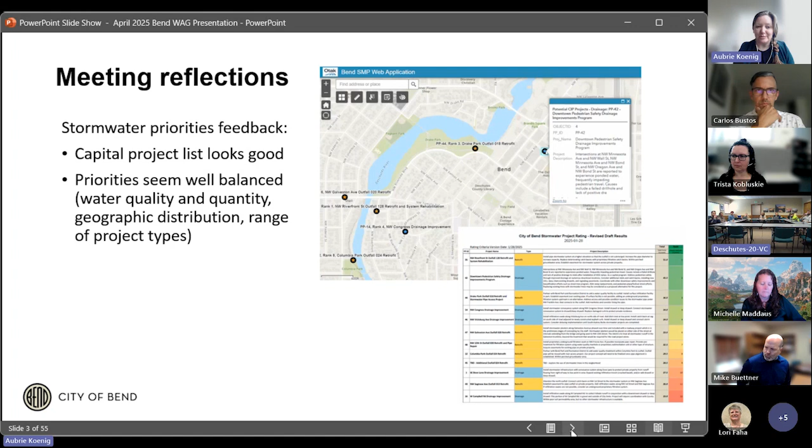We didn't have a chance to meet in March, or didn't need to meet in March, but back in February we did have a chance to hear from the Stormwater Master Plan team about the draft list of project priorities as part of that planning effort, and got some quick feedback and thumbs up generally from the group, the WAG members, so a good balanced list. There's a couple of snaps from the map and the project list that we went through. As always, the meeting recordings are available through the webpage if anybody didn't get a chance to join us in February and wanted to hear how things turned out. That will be our topic for next month as well, the Stormwater Master Plan.

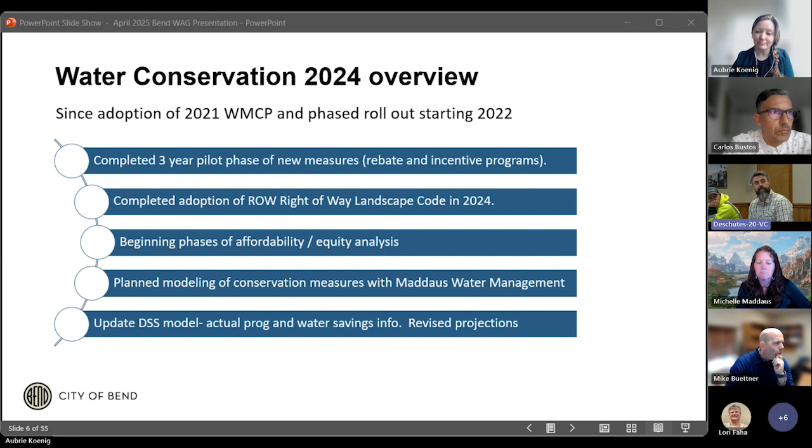So that's one piece of the work that we're going to be doing with Maddaus. And the second piece you'll hear a little bit more about today is investigating some conservation-based water rates. Next slide, Aubrie.

And the primary reason is we get our population data from Portland State, and they did a historical correction in the years of 2020 through 2023. And they actually lowered our population numbers. So then our calculation of GPCD goes up a little bit.

We're seeing a general downward trend, a little uptick this year with more water production happening. We're looking at things, higher peak temperatures. We had a higher peak day than a typical year, happening in June instead of late July this year. We had longer stretches or longer windows of peak day temperatures. That's something we're tracking, and actually over the last few years, we're seeing that trend where our peak days are lasting 6 to 8 days instead of 2 to 3 days. So some possible reasons of why we saw that uptick in water use. Next slide.

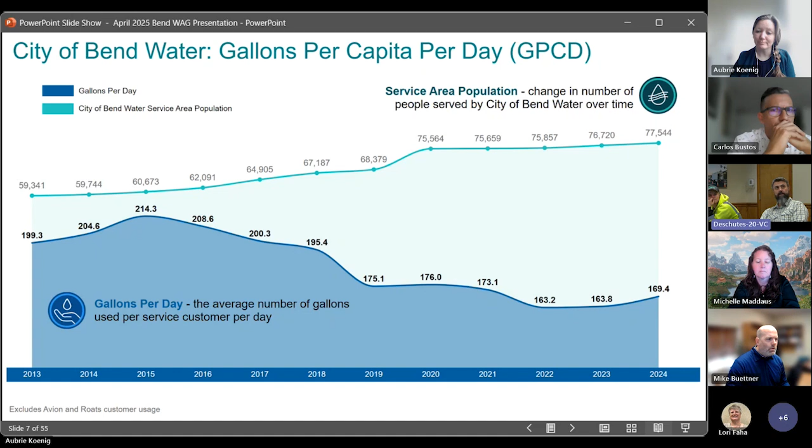So rebate incentives. The main idea here is we're seeing increased participation from year to year in our indoor-outdoor devices program. These are high-efficiency water use devices. We rolled this program out in 2022 after our WMCP adoption, and we're happy about that.

That is a council goal of ours, to increase participation in these programs. And we are seeing a positive uptick in water saved. This is not assumed water saved — we're actually calculating the water savings in a post-retrofit year versus a 3-year average prior to the intervention.

Can I ask how often the applications are coming from individual households and businesses versus coming through a contractor or irrigation company? I'd say the minority right now are coming through the contractor. At least on the single-family residential side, they have to log in through the WaterSmart portal, so they'd need login credentials from the customer to do that. On our commercial and multifamily side, though, we are seeing more come through the property manager.

So late in 2024 and now in 2025, we have more sites like Housing Works taking part. We also have some of the retirement homes, and those are coming through the third party.

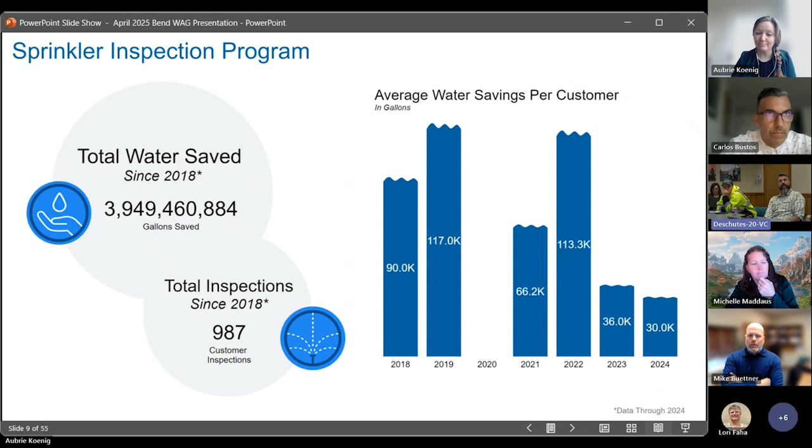Still a viable program, but interestingly you can see that downward trend in average water savings. We're still saving roughly 4 million gallons a year. What we're seeing, I think, is a lot of the low-hanging fruit going away — as we talk about conservation more, people are hearing it through different media and through the drought spells we had, so we're seeing a little less excess use even in those targeted customers.

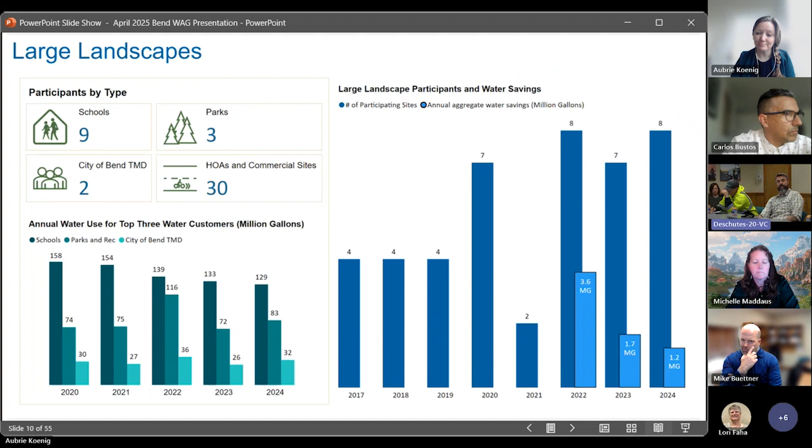If you go to the graph on the right with the blue bars, what we're seeing is growth in interest, primarily through HOAs — people contacting us to participate, looking for water savings opportunities, but not as big savings as we see through parks or schools maintaining 50-some sites. We're looking at some HOAs with maybe 15 to 20 homes with a little common area, up to large HOAs with multiple acres of landscape.

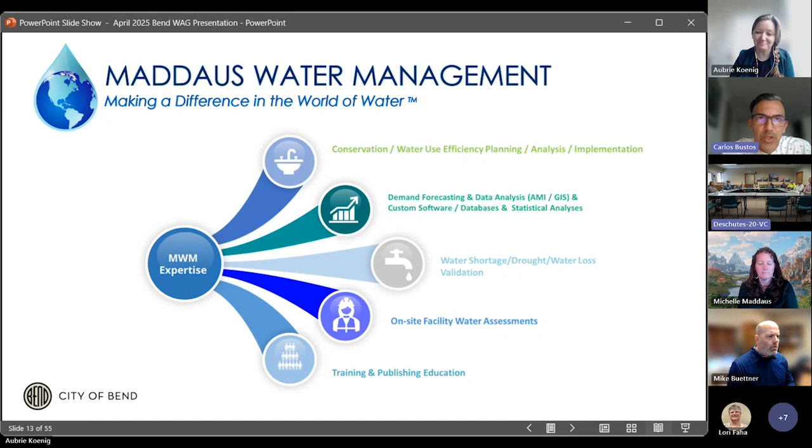We're considered a small firm. We've got 9 employees throughout California, Colorado, New Mexico, and New York. Our expertise is in water conservation planning and implementation. We do demand analysis and forecasting, and we work with urban water use objectives in California, developing urban water management plans. We also have a few publications, including the Water Conservation Guidebook for AWWA and the International Water Efficiency Guidebook. Michelle Maddaus and Lisa Maddaus are the current leaders and owners.

So today I'm going to be covering a couple of topics. I'll try to be concise and precise with each slide, and we can either have discussions or questions as we navigate through, or wait till the end. I think we have 20 or 25 minutes allowed at the end to gather feedback and really go in depth into what we're trying to achieve and our next steps.

So I'll be reviewing the project scope. Dan alluded to the work we're doing, and I'll cover it a little more in depth, but briefly. The related work, which is the one I'm leading, then the purpose of rates, covering all the rates included in some of the publications I'm using as references. I'll talk about elements of rates, and then Dan is going to jump in and help me cover the current Bend rate structures. Then I'll compare some common rate types, and go in depth into the main research, which is understanding budget-based rate types, and then gathering feedback.

So the project scope, which we've been hired by the Conservation Department to work on, covers 2 main tasks. One is reviewing and refining the city's decision support system model. We worked with Dan and his team back in 2020, where we looked at conservation measures, population growth, different customer categories, projecting droughts, and future conservation. We plug that into our model, which projects demand forecasts and the impact of conservation measures and future population growth. That's the first aspect, which Michelle Maddaus is leading and working with Dan. I'm going to be focusing on the second task.

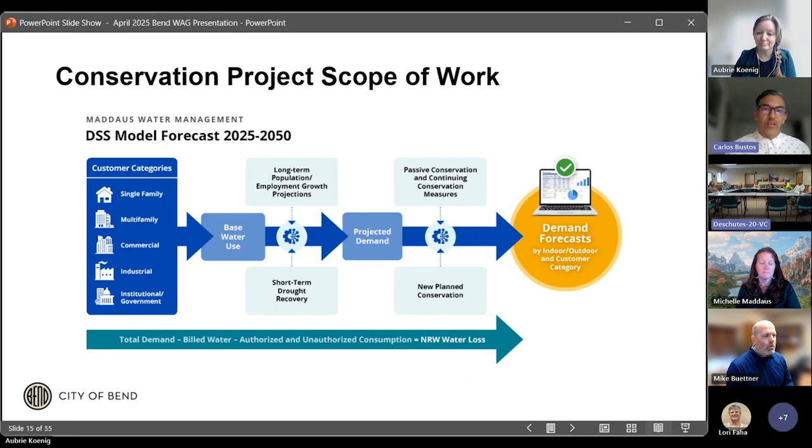Next slide. Which is providing budget-based rate research. I'm not doing a rate study per se—I'm not looking at Bend's current rates and seeing how they're functioning in real time, or if they need to change for a specific customer. Basically, my role is to look at other rates, specifically rates that are managed through water budgets, and provide that information to Dan and Lori so they can use it as part of the conversations for the future rate analysis study.

As part of this task, I'll be reviewing the best practices for conservation budget rate design. I'm gathering background on different rate structures, comparing budget-based rate structures, effectiveness, and objectives. One objective can be reducing peak demand while maintaining affordability and making sure that rates are equitable.

I'll be reviewing recent case studies from a gamut of different utilities all over, mainly the West, but also mainly from Texas all the way to California, including some utilities that we're starting to look at in Oregon.

After that, and this is the main conversation we're having today, I'm presenting this information to the WAG group, which is today, and we're talking and gathering feedback and looking at different options and how we can structure the next stage of the research, which includes taking those objectives that we'll discuss today and collecting and narrowing down the utilities to 10 utilities. We'll look at those 10 utilities and how their budget-based rates function, how they work in the real world, and then we'll provide a report to Dan and Lori.

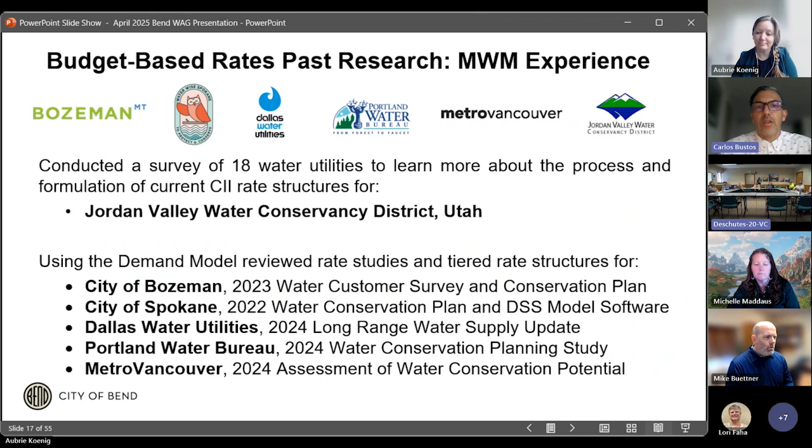As part of our demand modeling, we looked at their current rates, and we looked at how they structure it and how specifically they're affecting customers in the commercial, industrial, and institutional sector. Next slide.

So jumping into the topic, I'd like to first start out by covering the purpose of rates. I'm sure many of you are familiar with why utilities have rates to begin with, why they are important. But just to emphasize, I like to cover that rates are essential for our operations. They ensure financial stability, they ensure operational efficiency, and more importantly, sustainability of our water systems.

They're designed to collect enough revenue from the customers that utilities serve in order to cover operating and maintenance needs that are daily, ongoing, 24 hours, and are projected to be maintained perpetually as long as we've got cities and urban areas and small towns, which we all depend on water.

The other purpose is to promote equity. So rates need to promote equity. We have a lot of low income, fixed income customers within our service areas. So we've got to make sure that as we're designing rate structures, customers, and particularly the vulnerable populations, are not disproportionately burdened by the types of rates. At the same time, a well-designed rate structure ensures that a customer pays a fair share of how much water they're using. That's to benefit the system, but also just to benefit the service area at large.

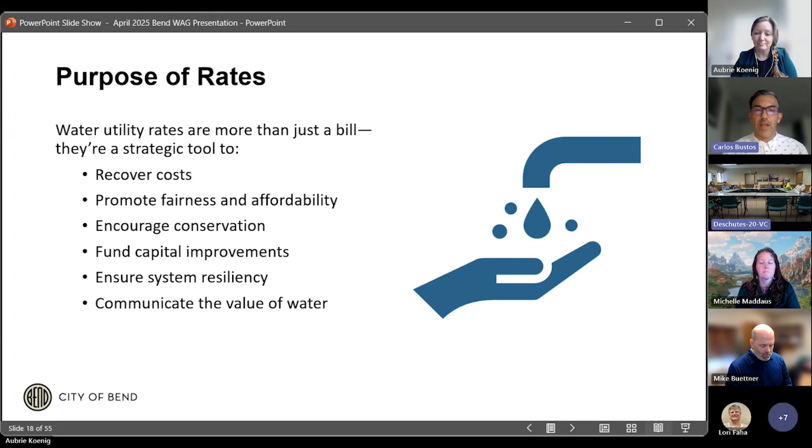It also supports capital improvements and system resiliency by providing much-needed revenue for capital improvements, such as replacing aging pipes, which we all have, upgrading treatment facilities, and expanding future capacity or growth. And ultimately, it provides for financial stability. The rates should reflect the true cost of delivering water, but also help customers understand that water is not free. Next slide.

So when we're looking at rates, there's some specific elements that are important to consider. When establishing water rates, utilities need to carefully balance multiple factors to ensure that rates are not only providing the much needed revenue for operation and maintenance, but also they should be fair, equitable, sustainable, and politically and financially sound.

In regards to cost of service, rates should support the utility's financial health. They should ensure the revenue requirements align with long-term financial planning, including future asset management and infrastructure goals.

In regards to affordability and equity, when we're looking at rates, we should analyze the impact of rates on low-income households and vulnerable populations. In regards to demand management goals, there's always the main balance between maintaining stable revenues and also incentivizing conservation so you can expand, extend, and maintain a healthy supply source.

In regards to political and regulatory, that always comes into play. So you must consider the public and political process. As part of that, stakeholder involvement, council and commissioners' involvement is key to having a sustainable rate structure.

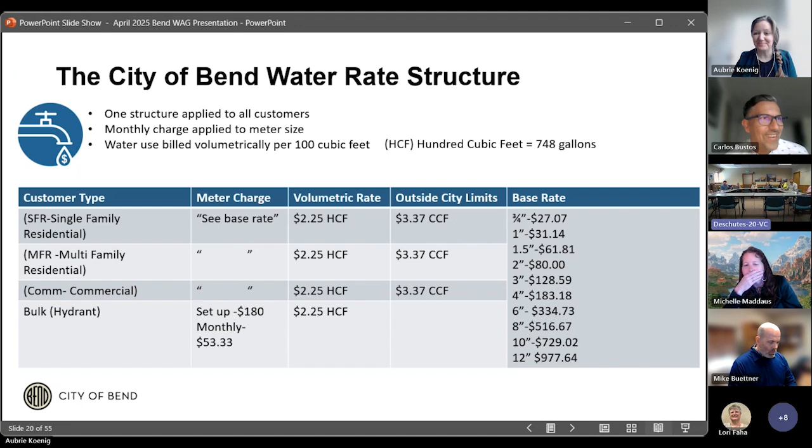This shows the types of rates you currently have. It's a great example of combining two different rate structures: a fixed price per unit, plus a base charge for your meters. Utilities typically develop this structure because the base covers regular operation and maintenance, or can be designed to cover new meters, new customers, or continual capital improvements and operational needs, like staff salary. The fixed price per unit is something you can forecast using demand models to design your financial sustainability year to year.

I believe there are 11 types of different rate structures. I'll cover them, and then focus on the budget-based rates, diving deeper into those.

The AWWA manual, which you can use as reference and get familiar with if you're going to be involved in a future rate study, outlines several types of rate structures. One is the uniform rate, which has a fixed price per unit of water. It can be by gallons or by units, CCF, HCF. Regardless of total volume used, you always get that fixed price per unit.

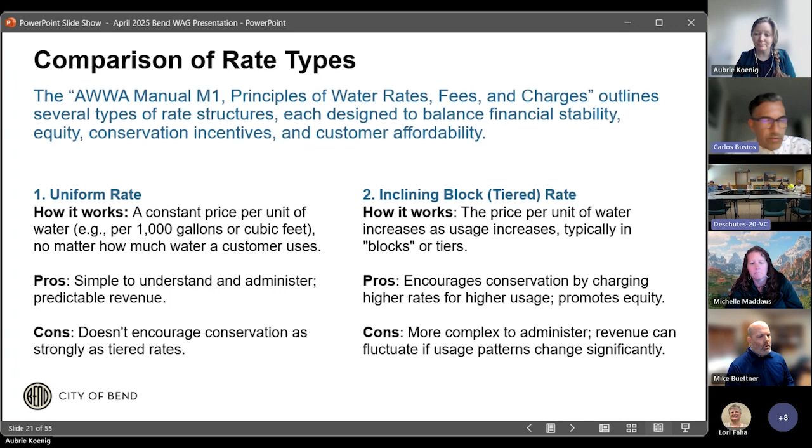Next slide. The other one, surprisingly popular in the 80s and 90s, was the declining block rate. It actually encouraged large users to use more - the more you use, the lower your price. That was really to encourage growth and attract large users into cities. I don't think anybody's using this type of structure in the US now, but I thought I'd mention it, not to persuade you to use it, but as an informational piece, because it does exist and has been used in the past.

The fourth rate is the seasonal rate, which is something we use in Albuquerque, for example. We have a mix of different rates. During the winter time, between December and March, we look at indoor use, and based on that we set what's called your conservation charge. Basically that's your efficient use, where you have an average of how many units you're using during those four months. That average is used to determine your sewer rate for the rest of the year, and it's also used to determine your efficient use.

Once we start the irrigation season in April, if you start using more than 2, 3, or 4 times your winter average, you start going into - not necessarily penalties - but you do start paying more for the water you use in different tiers. Albuquerque is actually going to be one of the case studies we're going to be looking at as part of this research. Next slide.

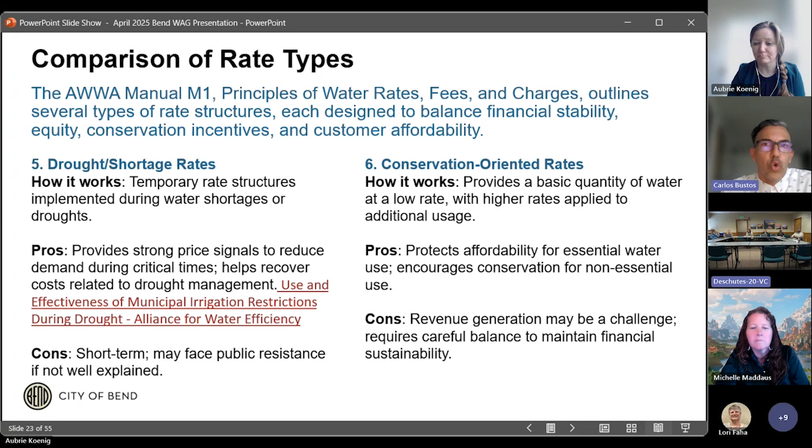But if you go beyond that, you start going into the non-efficient or excessive user category, and at that point you can look at whether you have any leaks, malfunctioning, or inefficiency in your property, and you can contact the conservation department to seek help. It's really effective in curbing excessive use above basic needs, and that basic need is really specific and tailored to your service area.

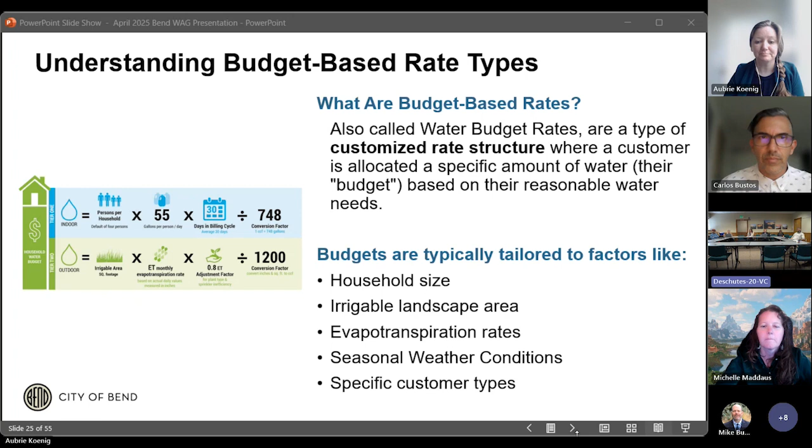In essence, there are two main types of water budget rates. One is indoor-outdoor. Typically you see this whenever there's one type of meter - only one meter supplying a commercial site, or a multifamily property that may have multiple buildings, or a single family residential. In this case, whether it's commercial, single family, or any type of customer, you will look at the number of people that use that property. It can be seasonal or it can be permanent, and this may vary from single family residential to your commercial, industrial, institutional, multifamily customers.

And then based on that, you come up with a standard gallons per person per day. That can be 55 gallons per person per day, or 30 gallons per person per day. It's a factor you can determine based on existing data, or you can also base a factor on what you want to achieve in the future. So if right now your GPCD is 169 and you want to get to the point where it's 120, you can factor that into your budget for indoor use.

And then for outdoor, the goal is to really understand the landscape. Sometimes you can make assumptions, such as 50% low water use plants and 50% high water use plants. You can ultimately use available information to understand watering needs and come up with a budget. You can make assumptions about average lot size, or you can do a more customized geographical examination and landscape classification, which I'll touch on.

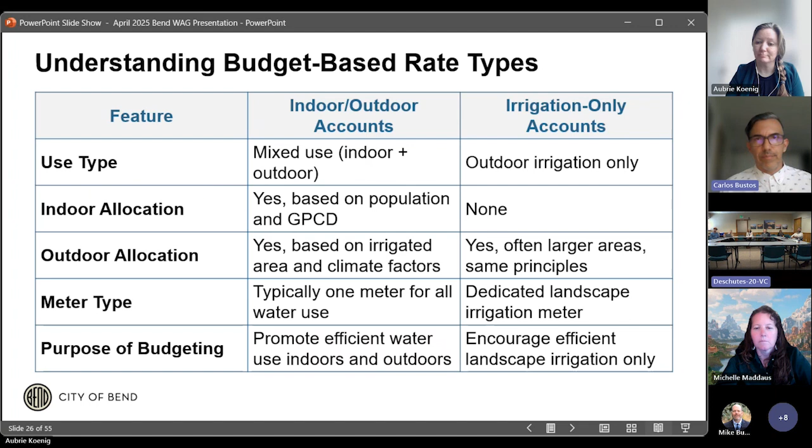When implementing these, it's really important to allow customers to request adjustments and have a variance period. Typically, what I've seen both in urban water districts in California and in Albuquerque is that they provide a budget, then allow a year for the customer to respond with their actual measurements and household size for their property.

Budget rates can be very effective in regions that experience high outdoor irrigation demand or where water scarcity is a concern. Utilities with a strong GIS system and customer data capabilities have an asset as they roll out, because they have a lot of information in-house. They're also effective in areas that experience droughts or climate change.

The pros: it promotes water use efficiency, equity, and fairness. If done accurately, it recognizes that not all customers have the same needs. It provides affordability protection because Tier 1 allows for essential needs, while the others encourage coming back to essential water use. More importantly, in the conservation world, it can help manage demand during high season and reduce peak demand. It encourages sustainable landscaping, because if you have a given budget and want to reduce water use, you can go from high-water-use turf grass to desert-friendly landscapes.

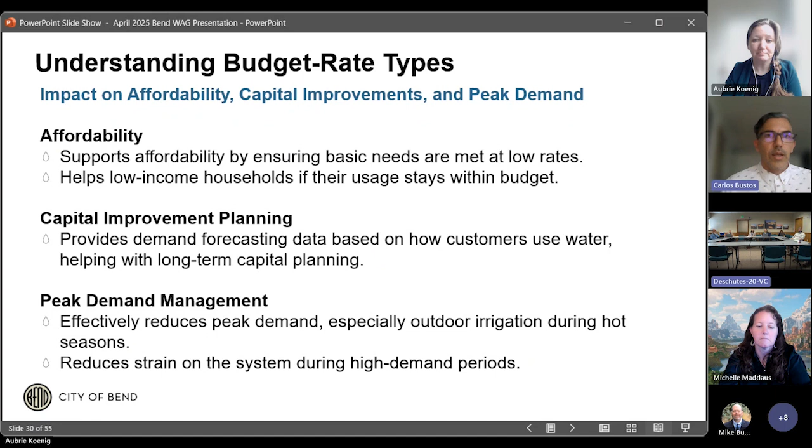We're looking at the next slide, and this is my last one. We're looking at 19 utilities right now. It's just a list we've been adding to through conversations with Dan and our internal research. Ultimately, we're going to narrow this list to 10 utilities and focus on understanding more about how their rate structures work and what the different functions and objectives of these utilities are, then zoom in deeper to work with 3 to 5 utilities, interviewing them and asking more in-depth questions about affordability, meeting peak demand, financial and capital sustainability, and so forth. That's my last slide.

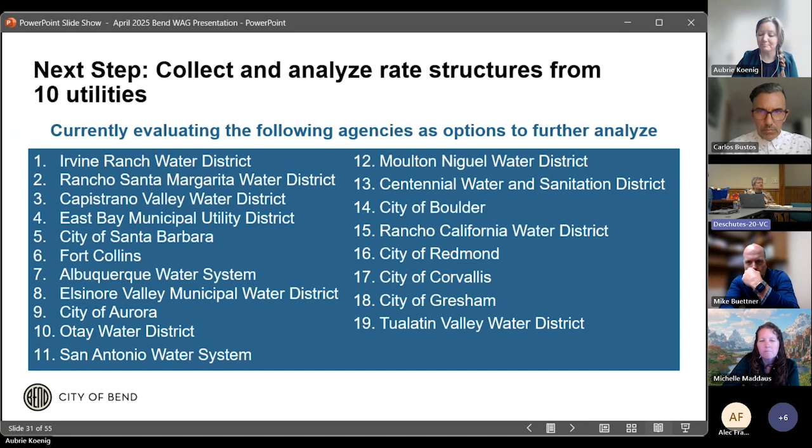I think, kind of bouncing off of that, finding a happy medium between finding as much water conservation as we can get and matching it to use per customer, but also not putting loads and loads of work, effort, and money into saving a few extra gallons here and there. I think this is a really great undertaking - finding that balance for the city so it's not burdensome.

Point taken. Okay, so if there aren't other WAG members, we could probably have Mike talk really quick. This is me cutting my boss off, so everybody just so you know. No, it's everybody knows it's hard for me not to jump in here.

One thing I would be curious about from those other cities, especially the ones in Oregon, is what have they done, if anything, to revisit their financial reserves policies. As you dive into this, that's something I'd be curious about. I know as we look at our long-term revenues, that's something we're thinking about - do we need to update the amount of money we have in the bank account in case things go wrong? Anyway, just something to look forward to.

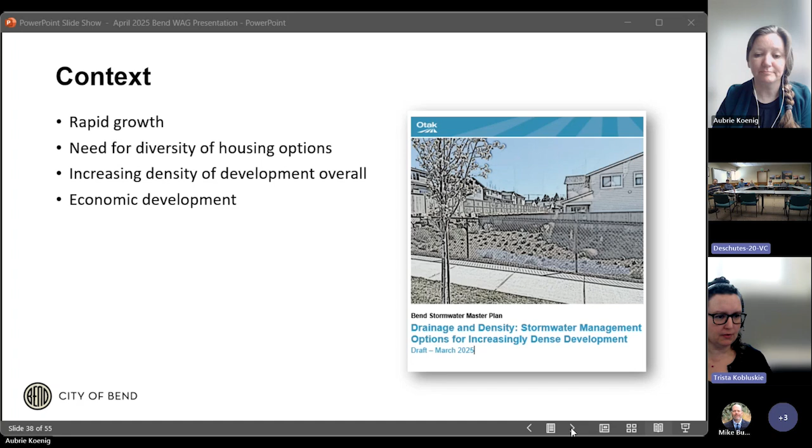If we take a quick look at the default method or pattern of stormwater management in Bend right now, the standards call for maintaining all stormwater runoff on the lot of origin. So in a residential subdivision, most stormwater facilities are actually located on the residential lot—they are managing the private runoff, and the individual property owner would own it.

That's in a single family or duplex type situation. In a townhome subdivision, the HOA might own it, but the stormwater facilities would still be located in a person's backyard or front yard. And in a non-residential site development situation—for our purposes here, this includes multifamily apartment buildings—the stormwater facilities might be located on the parcel, in the parking lot or a landscaped area, again generally only handling private runoff, none of the street runoff.

So any frontage improvements would require a separate stormwater facility to manage street runoff. This is usually a commercial property owner or the property manager owning or managing this facility. In infill home sites in areas of existing development where the street pattern is already set, the stormwater facilities are on a lot, managing private runoff, either owned by an individual property owner, a commercial property owner, or the HOA. Public projects, including frontage development constructed by private developers, are only managing runoff from the right-of-way, located in the street, and the facility owner is the city. So that's the general pattern as it exists now.

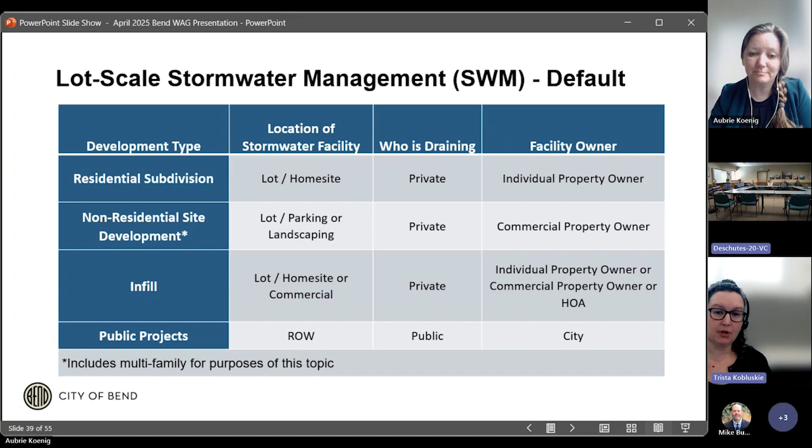If you go to the next slide, we think that has some limitations. Small residential lots don't have a lot of room for these lot-by-lot stormwater facilities. They might end up with a lot of stormwater facility in their yard and not much landscaping area. This on-site pattern really isn't compatible with zero lot line development. In the permitting realm, numerous small facilities might be using simplified calculations and assumptions over a subdivision for the engineering calculations. Imagine the field test cost and the inspection cost for 39 or 40 individual facilities on a subdivision. That could be prohibitive or perhaps not comprehensively done.

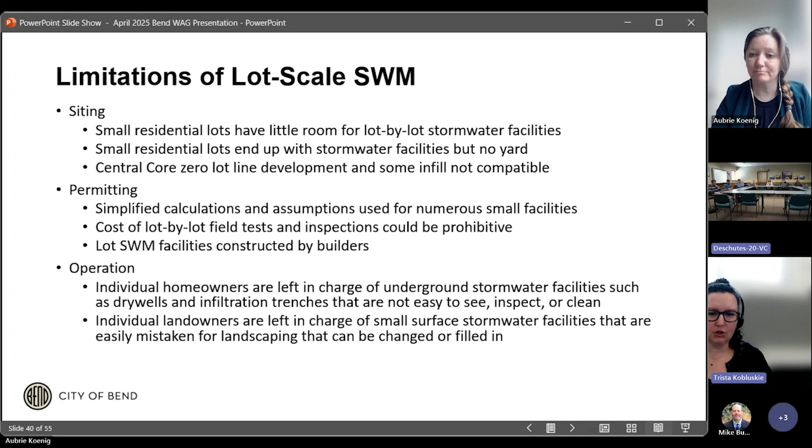This leaves stormwater facilities in a subdivision scenario to be constructed by builders who are more typically focused on building the structure of the home. From an operation perspective, this leaves lots of individuals in charge of managing stormwater facilities. They might be underground, hard to see, hard to inspect or maintain by an individual person or even by an HOA or a commercial property owner. This is a specialty area, not something your typical individual knows how to do. Even surface stormwater facilities might look like landscaping, and if they're in your backyard, you might think it can just be filled in, and you would then lose the function of that facility.

This is just one example. We don't have to spend a lot of time on it, but if this residential development were built as it was laid out here, and I did not confirm that, you can see each of these townhome lots has in the backyard a patio, a little shed, and then the entire rest of the backyard is taken up by what's called a rear yard depression, which is actually a stormwater swale. So there's not really much spot to recreate or use your yard recreationally. And in the front, there's also a stormwater facility off the front porch in each of these. This results in something like 38 privately owned stormwater facilities for one development.

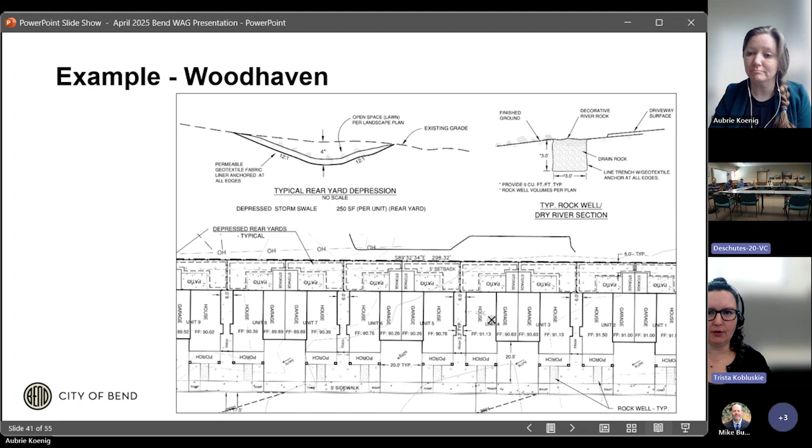This development also happens to have an existing, more centralized stormwater facility over on the west side, off the picture, present in the existing condition. So I think this illustrates some of the limitations of the current pattern. Maybe two more things to point out: either your whole backyard is one giant swale, or it's in a place where it's hard to see whether it persists through the first year. So either the homeowner doesn't really have great use of their backyard, or the city may be left with a nuisance resident who filled in their swale, which is more likely the case. And if the city had an inspection obligation on these, to confirm they were working, these are in people's backyards - that can be invasive, that can feel invasive. So just some things to think about there.

So one of the concepts we are exploring is whether the city's current code allows more centralized options for stormwater management. We're looking at several types of land uses, but I think the one I personally feel is most relevant is for residential, so we're focusing on that today. That doesn't mean we're not looking at commercial also, but just for the sake of time and simplicity today, we'll look at residential.

If we could centralize a stormwater facility on a tract or an individual lot in a residential subdivision, whether that's single family, townhome, or something like that, where would that stormwater facility be? It would probably be on a tract or an individual lot, maybe a combination of those two things. Maybe there are still some individual home sites that have a smaller stormwater facility, and then in addition, a centralized stormwater facility.

Should there be options for that centralized stormwater management facility, not just to manage the private runoff from the lots, but also the public runoff from the street? That would make the layout of the utility system far simpler. And we know stormwater drainage relies on gravity. We're not installing pump systems. So facilitating a simpler layout and not working against gravity would help simplify this.

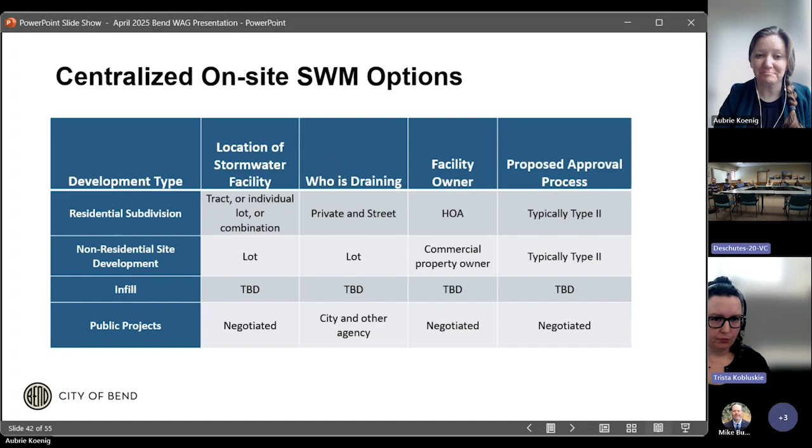So we are exploring whether the reasons for that are procedural or a lack of knowledge that these provisions exist. These examples are kind of what we'd like to promote or at least allow more often as an outcome of this study.

And that won't happen immediately. I think our recommendations coming out of this study will be code changes that you could look into, procedural changes that you could consider implementing, maybe training or advertising the existing flexibility. So those steps would take the next several months or a year or two to actually implement, and require coordination among different city departments as well as communication with the community.

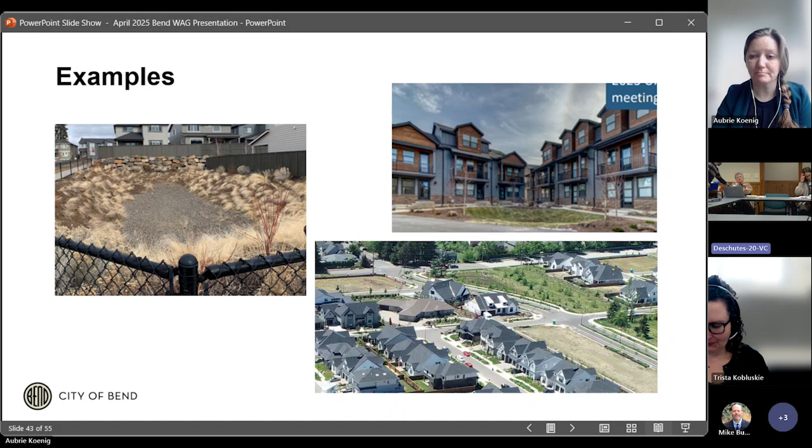Trista, can I make a quick clarification? When we're talking about the term master plan here, we're not talking about the stormwater master plan. We're talking about master plan as a land use term that we have for larger subdivisions, that it's a master plan development. Yeah, thanks for that clarification. I did not make that clear. We should be using different terms. Yeah, comprehensive stormwater plan. Okay.

So there are potentially some barriers, or potentially some surprising existing allowances, to some of these centralized on-site stormwater management options. Again, in Title 16, there are a couple of sections, 16.15.040A, with three subsections, 4, 6, and 8, that for various reasons under various circumstances allow stormwater runoff to leave the lot of origin and be managed elsewhere, especially in residential subdivisions.

And again, we're kind of still studying why these provisions aren't used that often. We've noticed that there's not a lot of discussion, or any discussion formally, in the application forms or the FAQ forms for pre-application, about stormwater. So perhaps this topic can be considered earlier in the land division process. We wanted to ask if WAG members are aware of other procedural barriers or lack of information about that.

And then there might be some funding barriers. When a developer, and we're talking about a larger land division here, sells the lots to the builders, there might be a financial disincentive to centralize the stormwater management, because the developer can allow that responsibility to fall to the builder and build those facilities on their lot. There's less of a barrier probably if the developer is also the builder. And then, next slide, Aubrie.

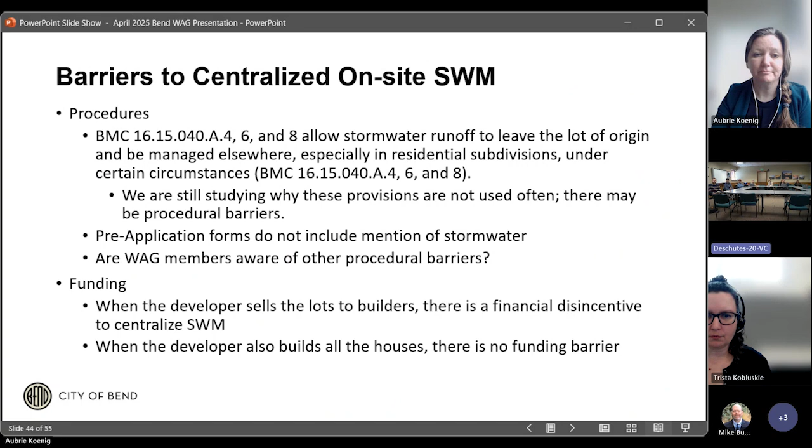So the current code and standards, Title 16, do emphasize, as does the Central Oregon Stormwater Manual, that runoff should remain on the lot of origin. It does offer other options, which are not commonly used.

Master plan developments have explicitly listed options for commingling public and private runoff, for managing stormwater runoff not on the lot of origin. So in master plan developments, they are more common. We are wondering if that language, which has been adopted for several master plans recently, could be applicable citywide with a code change.

Master plan developments have longer review times, so that could be a barrier as well. Not every subdivision wants to go that route. And then when the developer sells the lots to builders, again in a residential subdivision scenario...

What are the mechanisms for ensuring that a centralized stormwater management facility maintains erosion control through the life of the building cycle for all the lots? How long does the developer have control over it? When does it get turned over to the HOA? Does the HOA actually form? We're still studying that.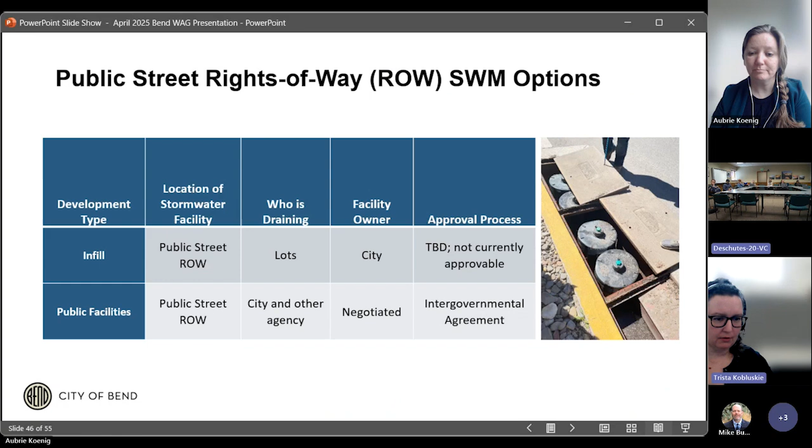We have heard from city staff that if we allow this more, or if we explore this route, any stormwater facility in a public street has to be owned, operated, maintained, and locatable by the city. So we would, of course, keep that tenet in mind when making any recommendations. And there are barriers to that. We'll skip that slide, and then there we go.

The last thing we are looking at as part of this white paper is options for regional stormwater management. There's overlap between the concept of centralized on-site stormwater management and regional stormwater management. I would say the biggest difference is when we're talking about regional stormwater management, we're more thinking of a facility...

Built in advance, often by the city through some sort of funding mechanism, or a developer who establishes a reimbursement district or something like that, that supports a redevelopment area to allow, like Central Core, that zero lot line development, where they don't have to put stormwater facilities on individual lots as they redevelop and use the full lot to the lot lines.

What would be the process for that? So we have studied other regional stormwater management options that have been successful elsewhere, mostly focusing on the Portland area and the Seattle area at this point. We would be interested in any feedback from WAG about regional stormwater facility systems that you are aware of...

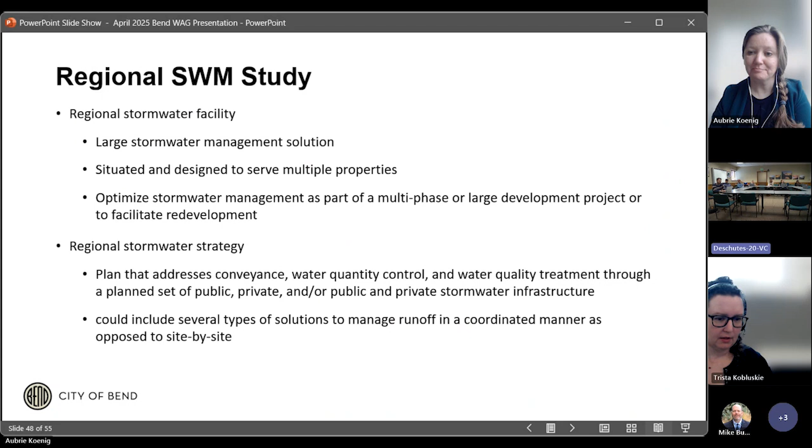In Central Oregon that have been successful, if you are aware of any. And there are advantages and disadvantages to those. We'll just skip the next few slides given our lack of time. I think I've basically covered what our very early recommendations are to consider...

Changing some of the policies and procedures. One thing I haven't covered is the technical standard. This is on our last slide: giving more options for stormwater facility types or best management practices that can be used. So we're looking, as part of the master plan, at ways to allow deep dry wells and stormwater trees as additional stormwater facility types that may give more flexibility. And then just evaluate the trade-offs.

If stormwater is allowed to be managed in the right-of-way, that means more public facilities. What is the impact to the city's stormwater fund, their operation and maintenance workload, their staffing, and those sorts of trade-offs? So again, we are in the midst of considering all these things and have some of these early thoughts, and would be happy to hear if you have any...

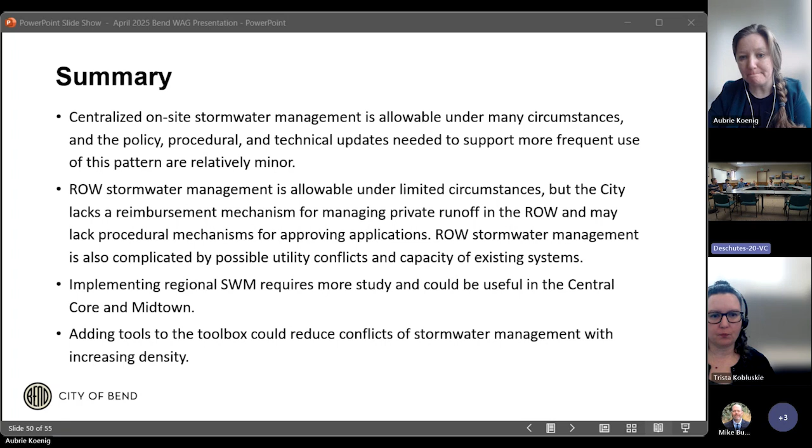You can provide input offline too. Yeah, maybe you want to go back to that slide of the questions. It's slide number 36.

I think we generally know the answer to the first one: do we support eliminating barriers to managing stormwater in a more centralized fashion? I think we heard in January, and through the meeting a few weeks ago, that this group does support this concept in general.

What do you guys think about the commingling of private and public runoff? As a general matter, any objections? If it's commingled, can it be managed privately on a private facility, like by an HOA? That's a couple of examples we have now. The other example would be if it's commingled, should it be a public facility managed by the city, which has financial implications, but it might be better long-term to ensure proper maintenance. So just any thoughts on that?

I recall the discussion pointing to where if there's public runoff in a facility, then that's managed by the public entity. But one thought that comes to mind too is that if private runoff is moving into a publicly managed facility, is that favoritism to a small group of people who just happen to be lucky enough to have their stormwater managed by the rest of the city?